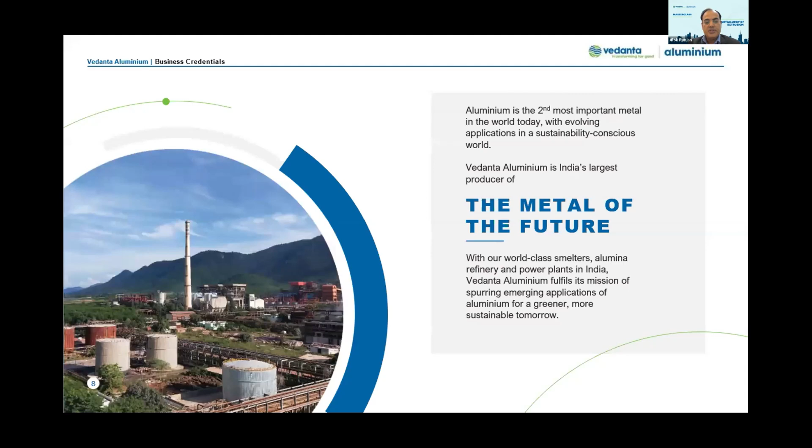Very quickly, I'll talk about the aluminium assets. Aluminium is the metal of the future because it's highly sustainable, infinitely recyclable, and highly versatile and dynamic. Aluminium today can be used to replace any other metal like steel, copper, wood, glass, or plastic. That's the diversity and versatility of aluminium, since it can be used in multiple applications.

In the aluminium business, we have an alumina refinery in Odisha, and we operate 3 smelters - 2 in Jharsuguda, also in Odisha, and 1 in Korba. Total installed capacity is around 2.3 million tons, but we are on our way to expand that capacity to close to 3 million tons. This expansion will come in Korba, Chhattisgarh.

One of the key differentiators today for any resources company is how sustainable it is. The biggest challenge any natural resources company faces is intergenerational equity - we operate with non-renewable resources, which means they will deplete and not last forever. So how do we develop resources in a way that future generations are not adversely impacted? There's a huge focus on that, and we take pride in it - we are one of the largest renewable energy buyers.

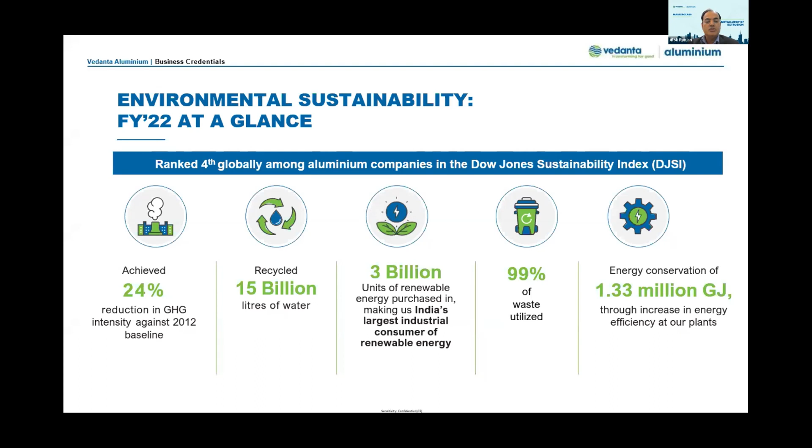For instance, we bought close to 3 billion units of renewable energy last financial year. We recycled 15 billion liters of water. Almost everything we produce is recycled and reused, so there's nothing called waste. We have a program called Wealth from Waste, ensuring nothing goes to waste, and we extract every value out of whatever we operate upon. Similarly, we were able to conserve close to 1.33 million gigajoules of energy last year - that speaks to our focus on sustainability.

I already spoke about the social impact. Another marquee feature is that when we talk about inclusion and diversity, it's not just about taking steps for gender diversity - we have gone ahead to include all genders. Some transgenders are also very comfortably assimilated into our family, working in various roles. This shows that sustainability or ESG is not just a buzzword for us, but is at the core, at the heart of our entire strategy, and we take pride in whatever we do.

So with this, I'd like to hand over the session to Ramya, who can then take this session forward.

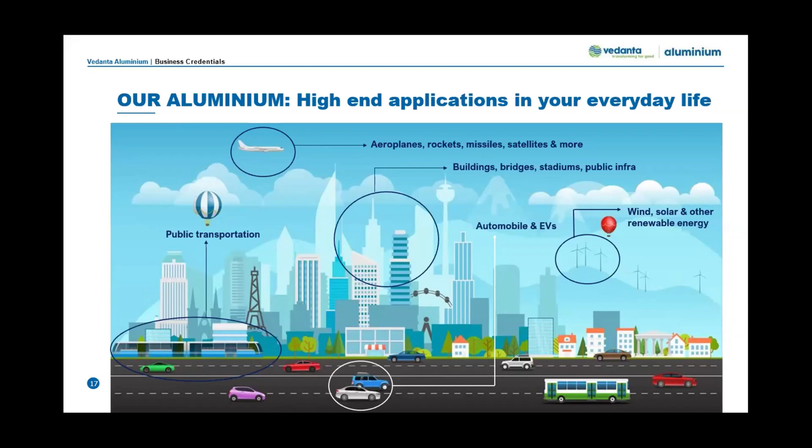Taking it forward, we are selling this product to 50 plus countries, which encompasses all the American continents, Europe, Oceania, and Middle East and Africa.

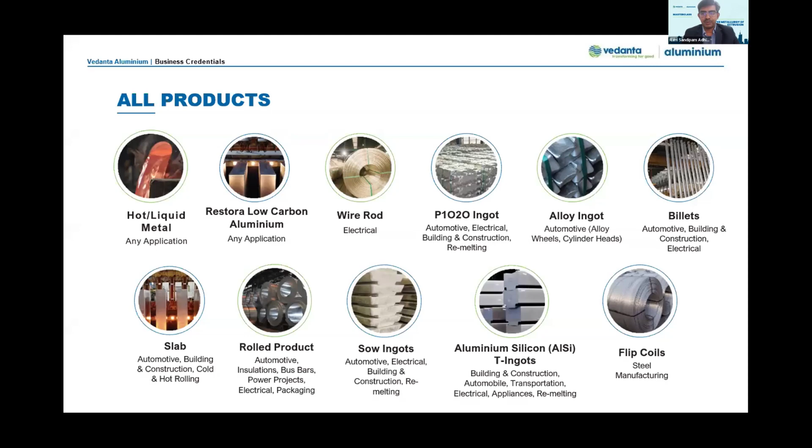Our products are typically supplied in various forms and factors, starting with wire rod, billet, foundry alloys, and remelt products. These products go into different applications, and the form factors and process depend on the end product, ranging from aerospace to automobile to electrical segments.

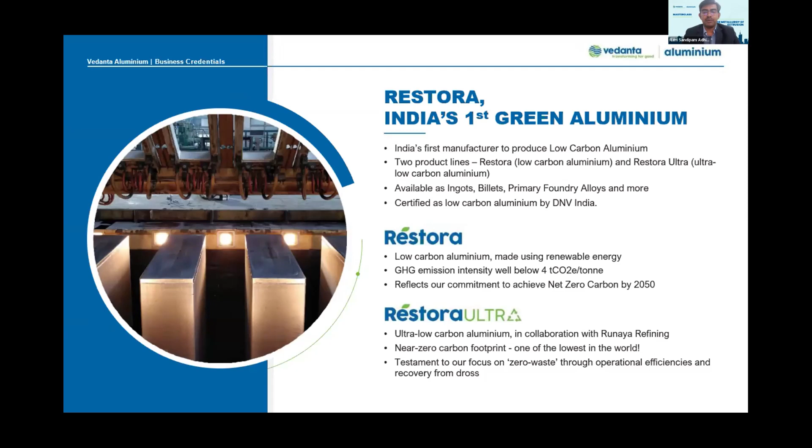Talking more about the sustainable footprint of Vedanta, we have launched two products: Restora and Restora Ultra. Restora is an aluminum product produced using renewable energy, with a GHG emission of 4 tons CO2. Restora Ultra is the ultra-low variety with near-zero carbon footprint, produced in collaboration with Runaya. This is a testimony of the zero-waste culture we are driving.

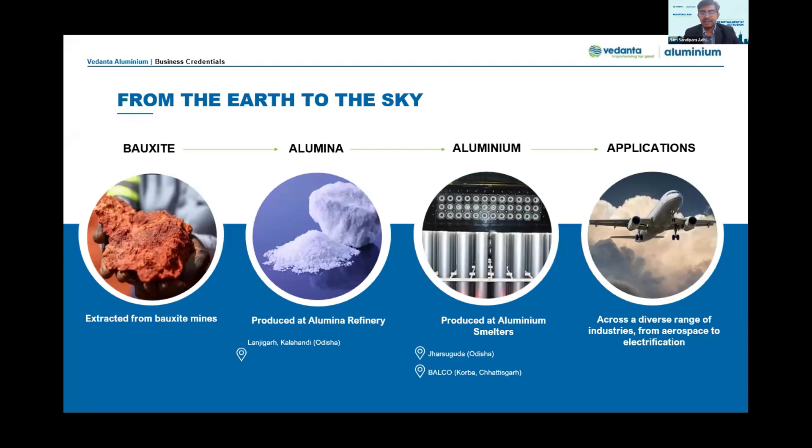Talking about our value chain, it begins with bauxite mining, then goes to the alumina refinery where bauxite to alumina transformation takes place. Then it comes to our smelters at Jharsuguda and Korba, Chhattisgarh, where we electro-refine alumina to aluminium. This aluminium is then transferred to our cast houses, where it takes various form factors before finding application in almost every aspect of our life.

Talking more about the technologies we deploy, it starts with state-of-the-art technology, and these technologies majorly come from USA, Austria, China, and Italy.

These are the typical production systems that we deploy, and we have our laboratory accredited with NABL accreditation, with all the state-of-the-art facilities to ensure our product stands out with respect to quality performance.

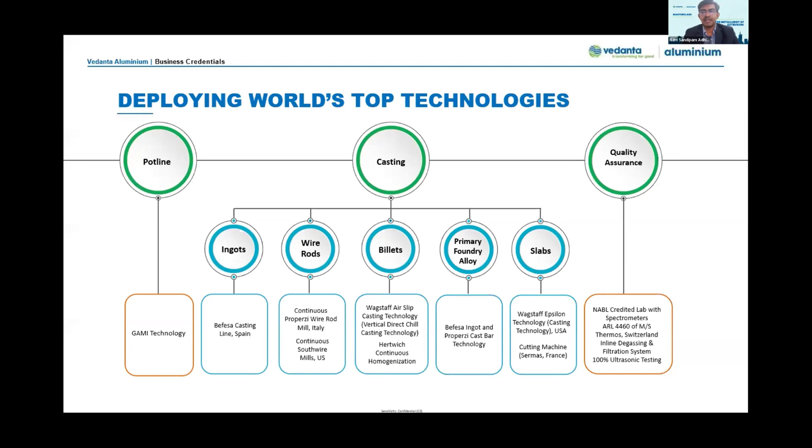Talking about quality, we are certified with an integrated management system encompassing ISO 9001 for quality, 14001 for sustainability, as well as 45001 for safety.

We are also certified with International Automotive Task Force, IATF 16949, which majorly talks about automobile requirements and how we comply with those.

Recently, we got 15 of our products certified with BIS certification as well. So on the quality and sustainability standpoint, these are the few certificates that we have.

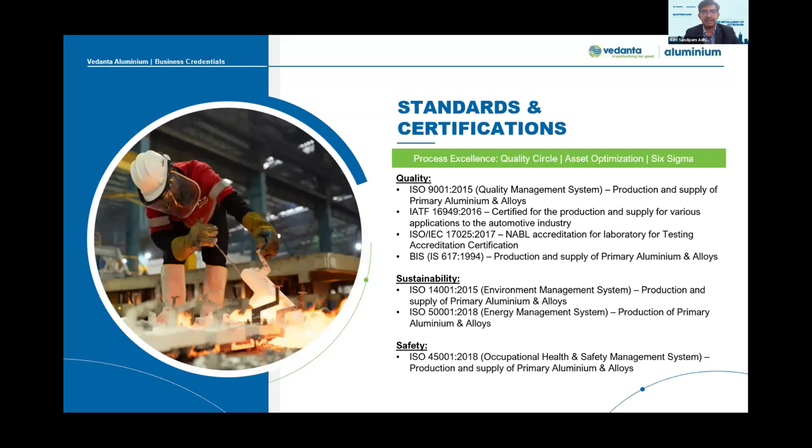Talking about customer service, we collaborate with customers to develop new products and support them in improving their production process and efficiency. We have our global expertise technical service panel who engage with customers to ensure they get the right input for product quality and to improve the overall journey. We also work on market development and customer devices if there are any.

Currently, we are at 460 KT operating capacity, which we are ramping up to 1.2 million. We currently offer diameters ranging from 6 inch to 10 inch. I am pleased to inform you that we have commissioned another 120 KT billet feed, which will offer 12-inch press size and diameter as well. We are also in the process of getting another set of tables for 5-inch, which will be commissioned by FY24.

Now, I would like to present to you a short film about our offering to the extrusion market.

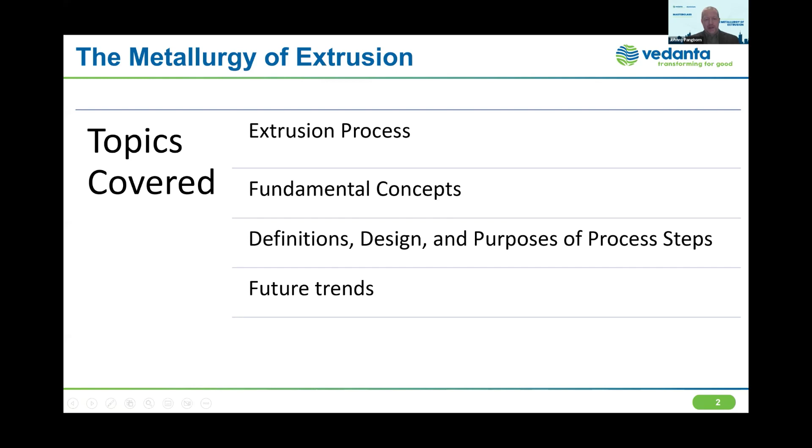General overview of the extrusion process. We won't get in too much detail, but talk about it with regards to the context of the metallurgy, building up to the importance of that and how we need to control that in our facilities - some fundamental concepts, some definitions, and looking into more detail into the design and purposes and the definitions of these process steps. And really that's where we'll get into the meat of the metallurgy. Then we'll close with some future trends, what's coming later.

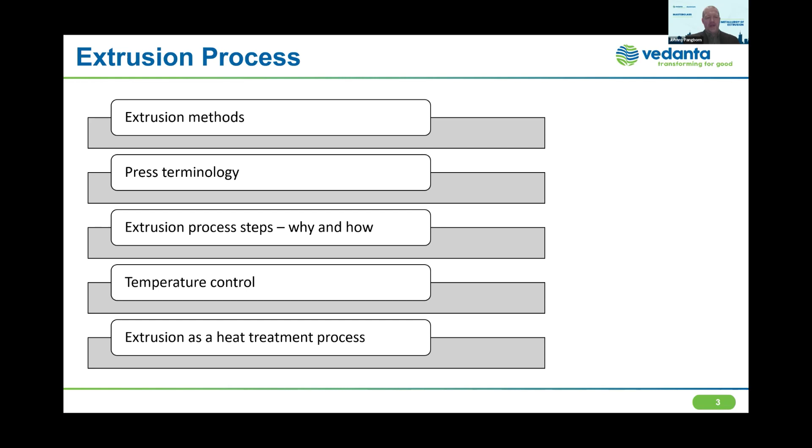Extrusion process - first there are several extrusion methods that we'll briefly outline, talk about some basic terminology so we all have the same understanding. Then dive into the process steps, the why and how of what we do, specifically addressing the need for good temperature control and presenting extrusion as a heat treatment process. In light of that, we're primarily talking about 6xxx alloys, although many of the topics would apply to all different types of products.

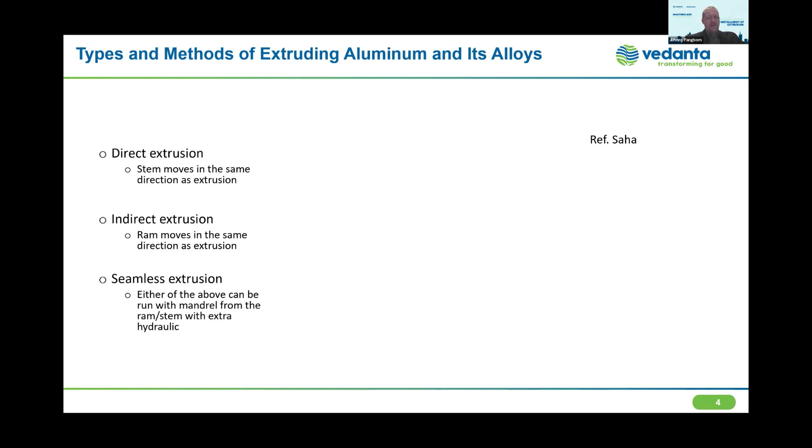Here are the three different methods of extrusion we're going to cover. First is direct extrusion, which is by far the most common, where the stem or ram moves and pushes the billet through the container and out through a die in the same direction. Indirect extrusion has a sealing element, a container that move together over the die - the die is moving in the opposite direction of the extrusion, and the die is on the end of a hollow stem or ram.

And then seamless extrusion, which can be applied to either of these, and the direction's a little different for this particular diagram, but the stem is moving from right to left, and there's a mandrel extending off the stem causing the hollow element within the die. In this process there is no seam, no weld, as we would see in a porthole die.

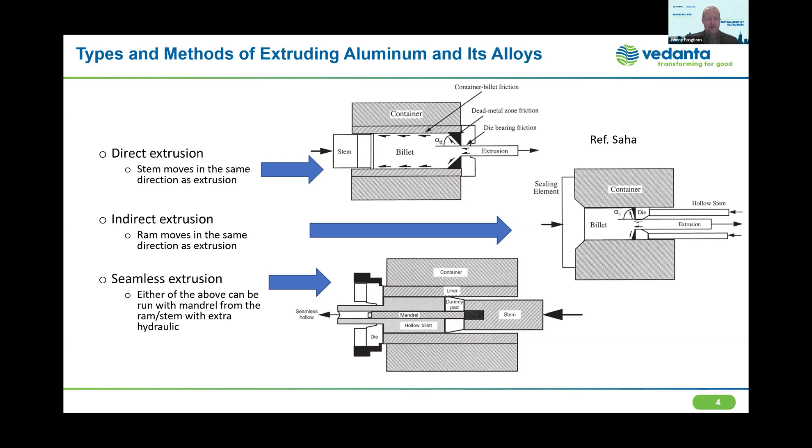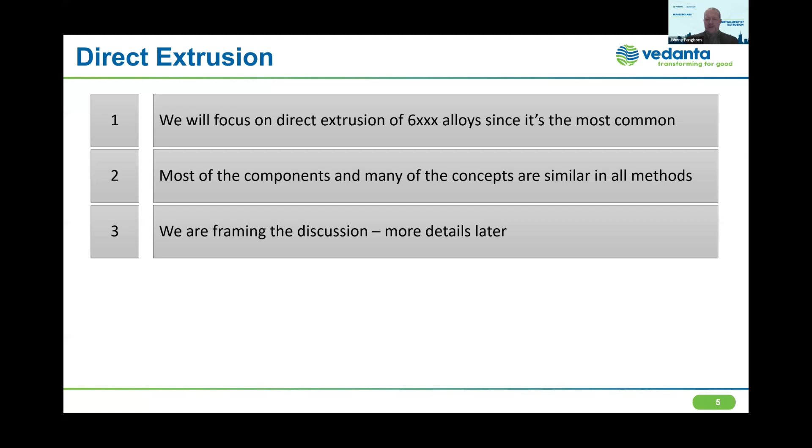For the purposes of this discussion, we'll be focusing on direct extrusion of 6xxx alloys, because that is the most common and most relevant to us. But most of the different components of the discussion will be similar to other alloys for direct extrusion and also to indirect extrusion and even other materials. As we go through this, we're framing the discussion for more details later when we talk specifically about the metallurgical aspects.

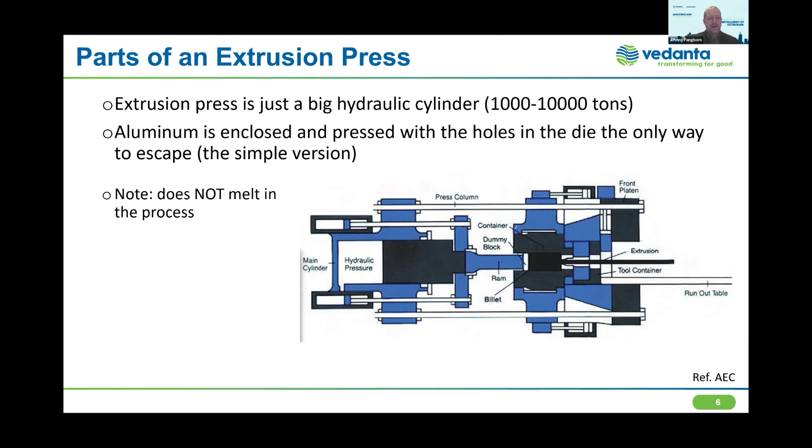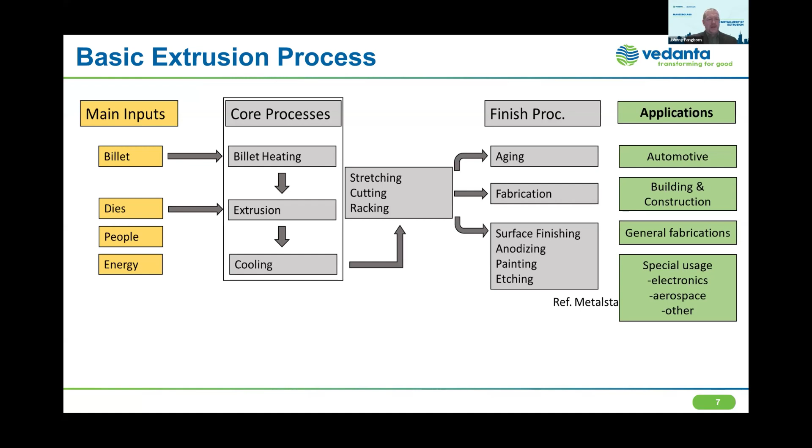So we're going to show a quick video, and some of this may be familiar for those of you in extrusion plants, but this is a very good video that outlines what we're talking about before we continue deeper into the metallurgy.

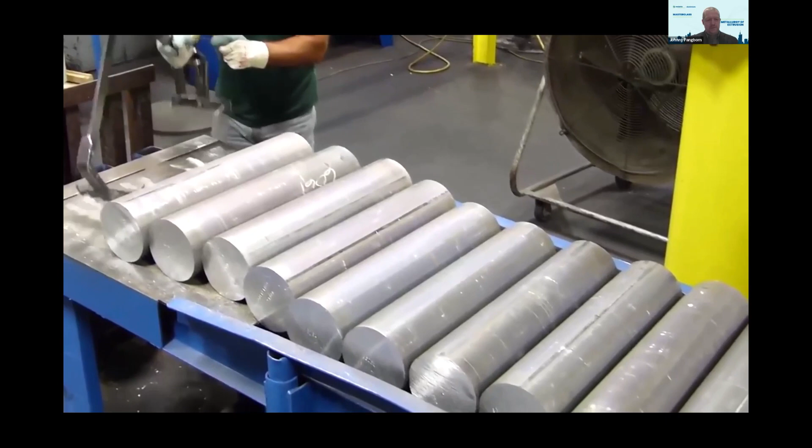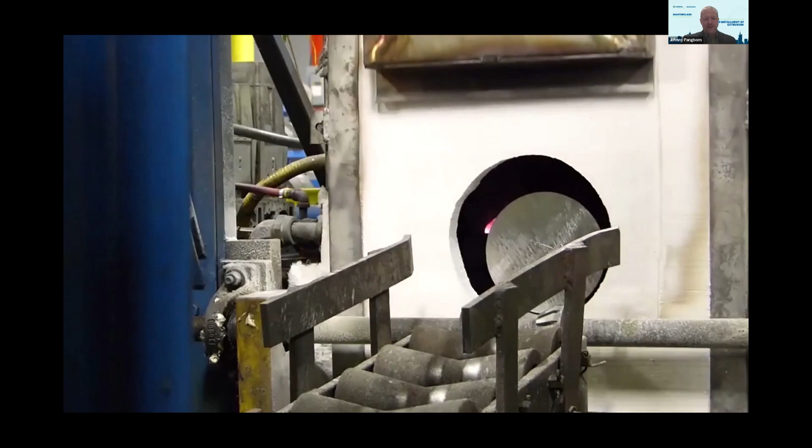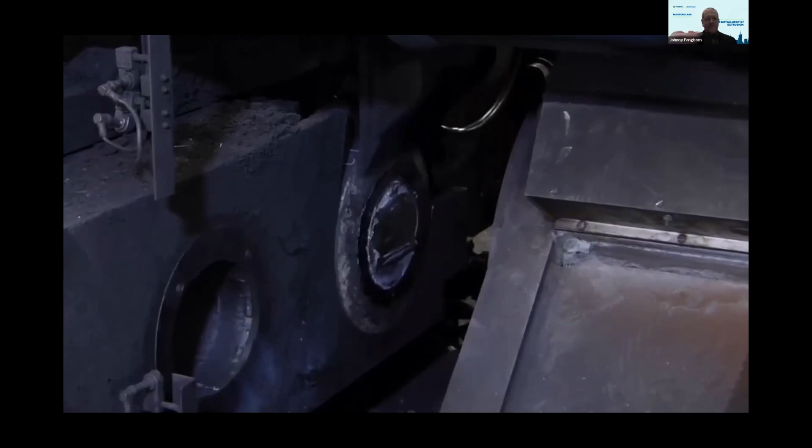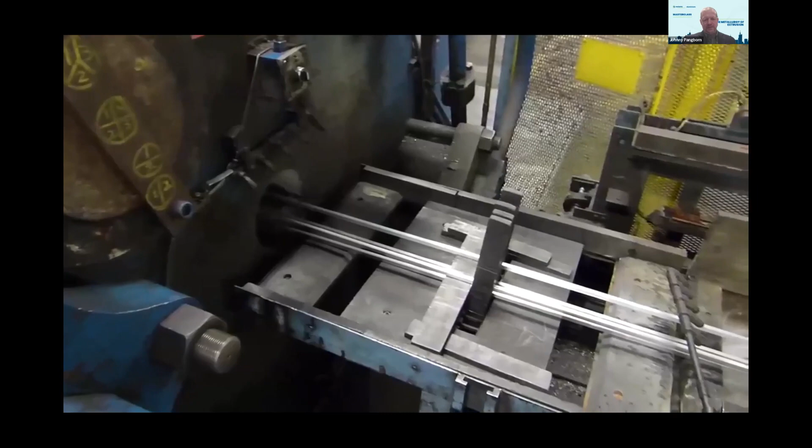Specified aluminum alloy cast in log form and pre-cut to uniform length is known as a billet and is first placed into the billet furnace, where it's heated to almost 900 degrees Fahrenheit. The billet then exits the furnace and is transferred to the extrusion press. The excess material from the previously loaded billet is sheared, and a ram pushes the new billet through the container and extrusion press using thousands of tons of hydraulic force. The soft aluminum is pushed through the steel die opening to create a fully formed profile.

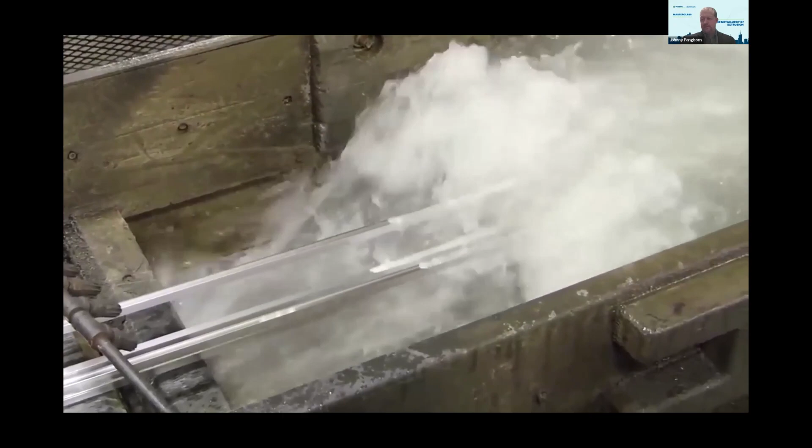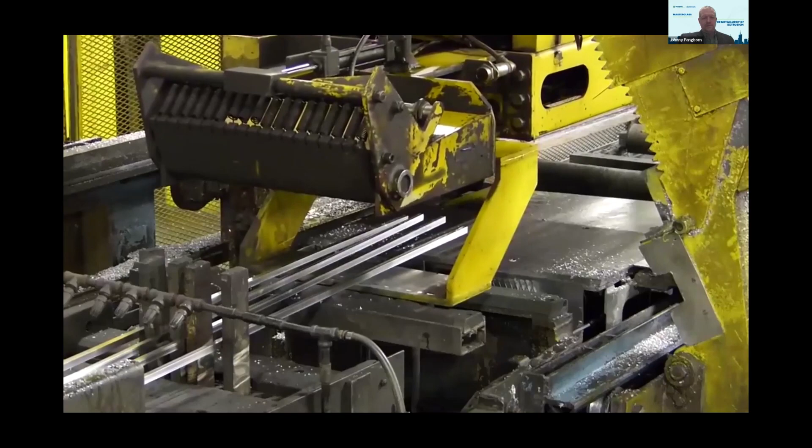As the formed profile exits the extrusion press, it is cooled in a water bath. This is called quenching and is done to uniformly cool the extrusion at a controlled rate to establish intended mechanical properties. A device called a puller grabs and secures the hot extruded length and guides the profiles down the runout table. The puller and runout table, a sophisticated mechanical process that uses conveyors and belt systems, is synchronized to the speed of the extrusion press.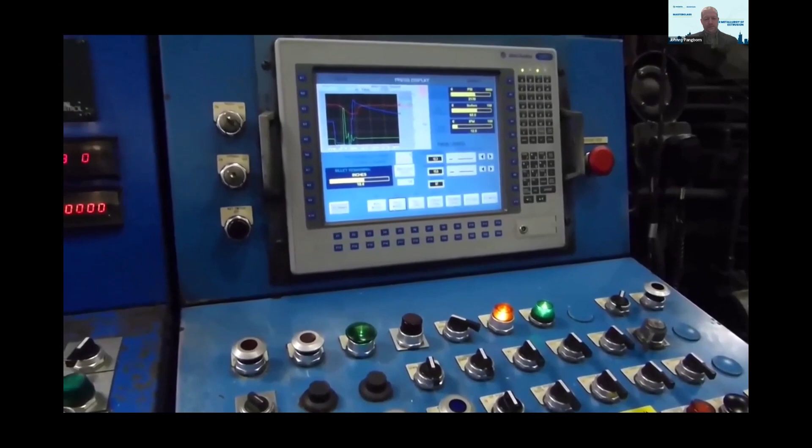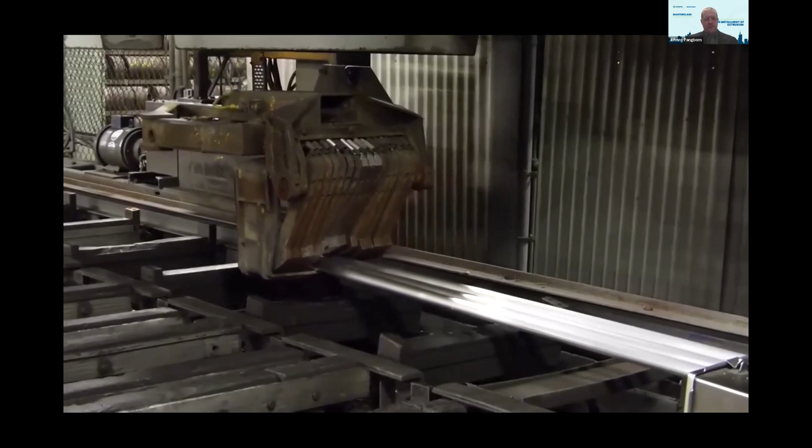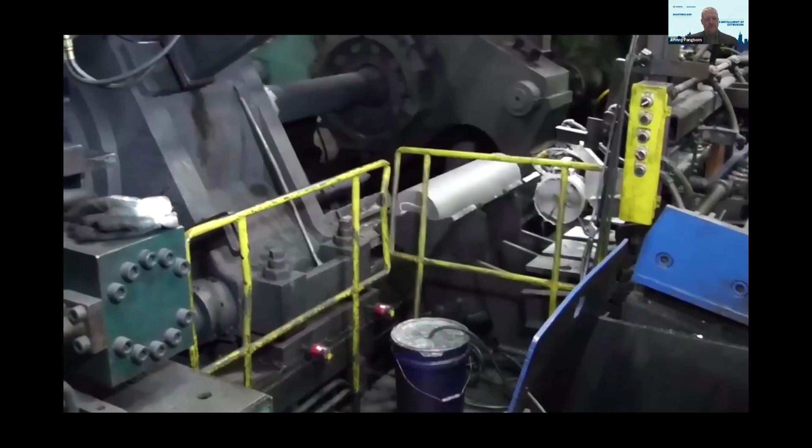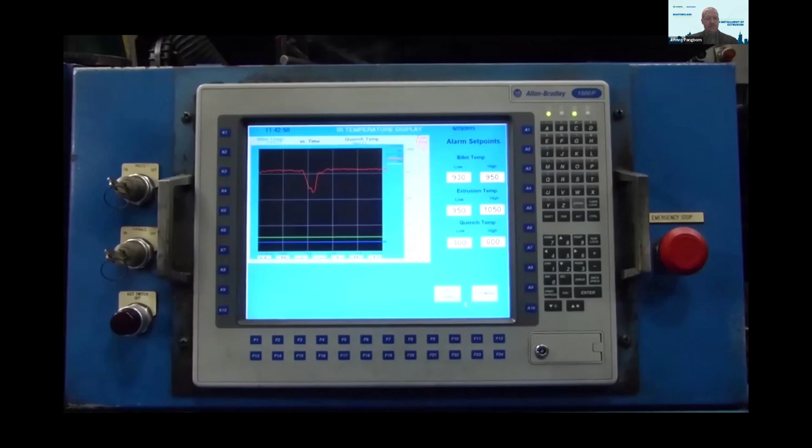Let's take a closer look at the importance of temperature and process controls throughout the extrusion run. Controlling the heat of the alloyed aluminum as it moves through production is a critical success factor that requires a number of variables to continuously align with one another. We've already discussed the heating of the billet to a malleable temperature, but you should also know that the container, extrusion die, and other support tooling are also preheated to temperatures that allow the aluminum operating temperature to be maintained at desired levels throughout each push. If these process components aren't precisely controlled within their specified temperature ranges, the operating temperature of the aluminum will be impacted by those components, either by adding to or absorbing from heat required for solution heat treatment.

There we go - excellent video there, and it shows the process, and it also leads into where we're going next, which is really going to be pretty deep into the temperature control and how important that is in the process. Next slide. Here we go. First of all, some definitions or fundamental concepts I wanted to outline.

First, strength. That's a very simple concept, but really what we're talking about is resistance to deformation. So in the aluminum, we're applying a force - how much force does it take to deform that?

Temperature, of course, is a very basic concept, but really what defines temperature is the movement of atoms - how rapidly and to what degree they're vibrating within the table in front of us, within the aluminum that we're processing. And that has a big effect for us as we talk about time and temperature, because the temperature changing allows things to happen more quickly or more slowly, and we'll talk about that.

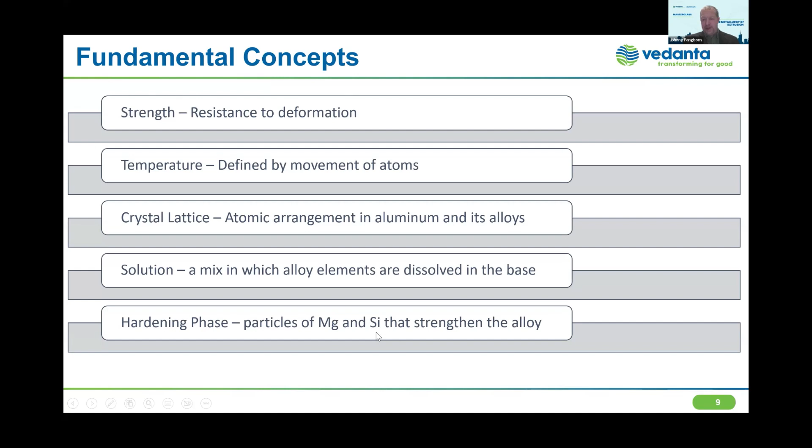Solution - this is an important concept. Basically, like you have hot tea and you put sugar in it, you are dissolving the sugar. In a similar manner, when we change the times and temperatures, we are solutionizing our metal, so that for 6000 alloys, magnesium and silicon, the primary alloying elements, we're dissolving those in the base aluminum, and we have a solution that, at least from a high level, is indistinguishable from the base. We'll contrast that a little bit with hardening phases, which are actually distinct particles that come out of solution. In our case, again, magnesium and silicon particles, and we control those in a way that strengthens the alloy.

So hardening particles - these are magnesium and silicon particles at longer times and temperatures. As the particles grow, they will become Mg2Si, but there are many other phases in the spectrum. This is, again, highly sensitive to temperature and time control. Again, remember, the definition of temperature is how active any molecules or how the atoms are moving.

So I'll show a little graphic here. On the left-hand side, let's imagine we're looking through a microscope at the microstructure of the aluminum, and we see little or no magnesium and silicon particles.

If we are out of control, what very often happens is we get equilibrium Mg2Si phases, and we'll get few of them, and there will not be very many. These have very little positive effect on strength.

Contrasted with, on the right here, if we were to take the same amount of magnesium and silicon and control how that comes out in the matrix of the aluminum, we would have many fine particles. And this is much more effective for strengthening.

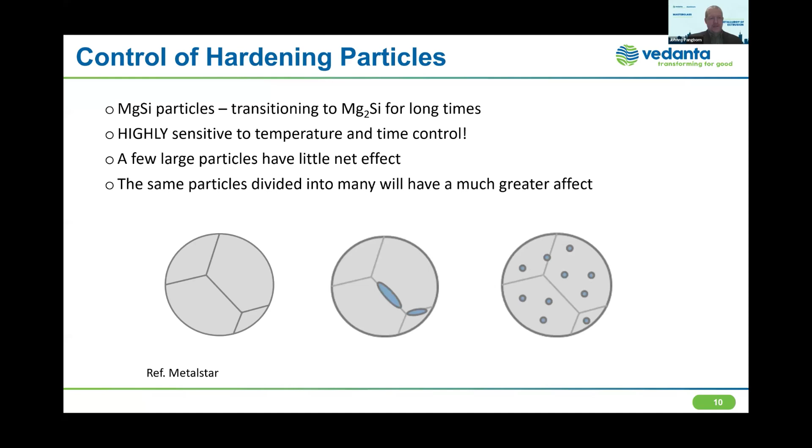So looking at this crystal lattice we spoke of here. This particular example is calling out copper atoms, so it's for a 2000 alloy, but it's exactly analogous to what we're talking about, where we have the solvent, primarily aluminum atoms in this lattice, and our alloying elements are mixed within, and from a distance, they're indistinguishable, and everything fits.

A particle, on the other hand, is something that is distinct and different. It is not in solution, but it is a distinct component. So in this example, these copper atoms, for us, it would be magnesium and silicon for 6000. They begin to come closer together, which is much easier at higher temperatures. Things can happen more quickly and form a distinct particle that no longer fits in this crystal lattice.

So you can see in this schematic, these lines are no longer straight, and that is going to increase the strength, as it will be harder to deform the structure. So when a force is applied, the material will not move the same way it did before, and this particle is providing strength. And then ultimately, you have more distinct particles as they grow larger. Eventually, if they grow large enough, you really don't have that many relative to the small ones, so you're not adding that much strength.

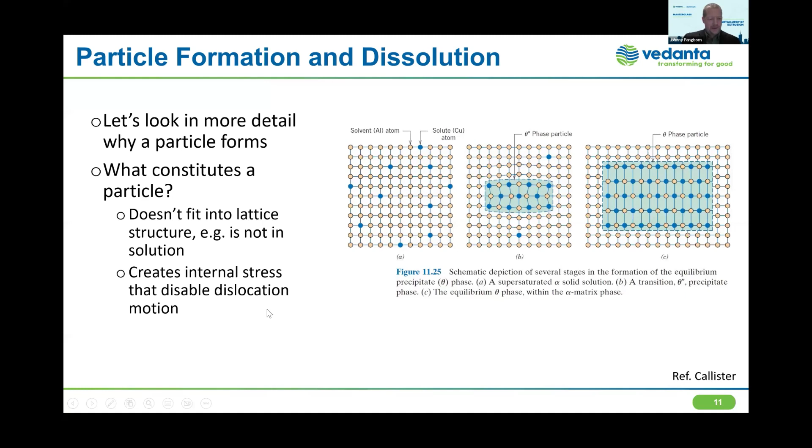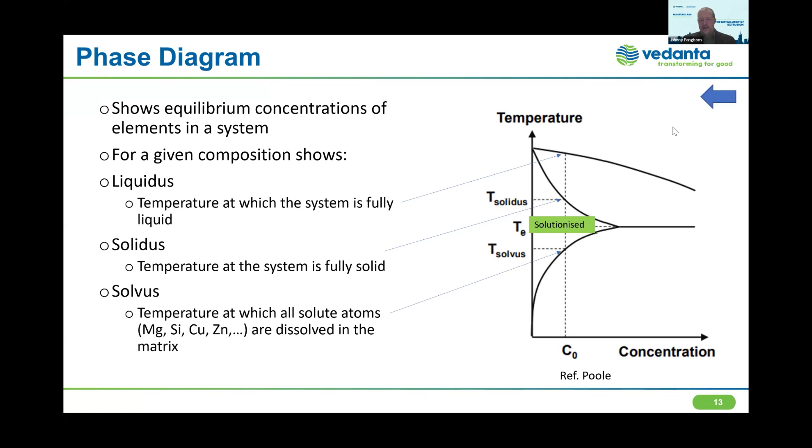Going back to this other slide here - this is defining the top of this critical range. And the lower is really defined by the time it takes. It's not that at the lower temperatures, the precipitation of these hardening phases doesn't want to happen, it just happens more slowly. So this has been chosen to be defined as kind of a critical range.

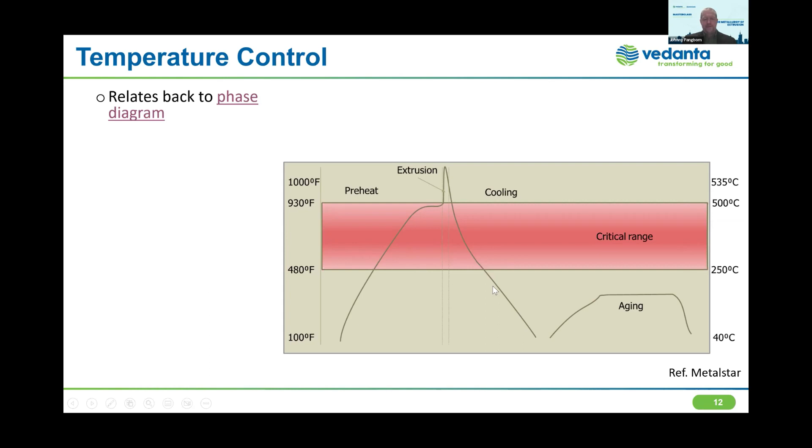In aging, we use much, much longer times, hours, to get the particles, and we're outside this critical range. And that's what we ultimately want to achieve at the end.

So we have some strengthening from the magnesium and silicon in solid solution, but in aging, we're increasing that by controlling and having these really fine particles that we want. So in extrusion, specifically the goal is to keep those hardening elements, magnesium and silicon, in solution so that we can age later.

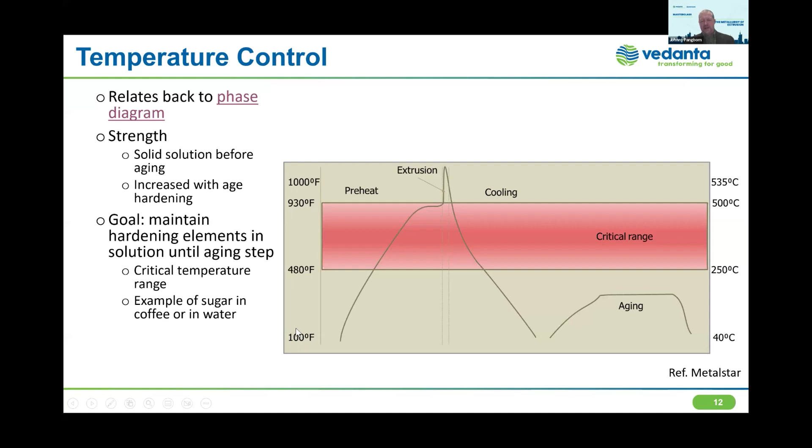So going through these temperature ranges, again with the example of sugar in coffee or tea or hot water being dissolved, and then at a lower temperature, you're not able to dissolve as much.

Looking more specifically at the extrusion process itself, we have our preheating step where we're going up to that critical temperature range. We need to have a softer alloy that we can push through the die reliably, but we also need to control it to get the final product we want, particularly in terms of property control or mechanical properties, by controlling how we go through that critical temperature range.

Extrusion, of course, is our main forming process. We have the heated billet, and we're pushing it through the die that we chose to produce something for our customer. But it's really important to control this and make sure we're well above the critical temperatures.

So the 500 C range we threw out there is the high end of the critical temperature range, because actually some particles will begin to form in preheating that we do not want, some large Mg2Si particles, but in extrusion we have the opportunity to absorb that.

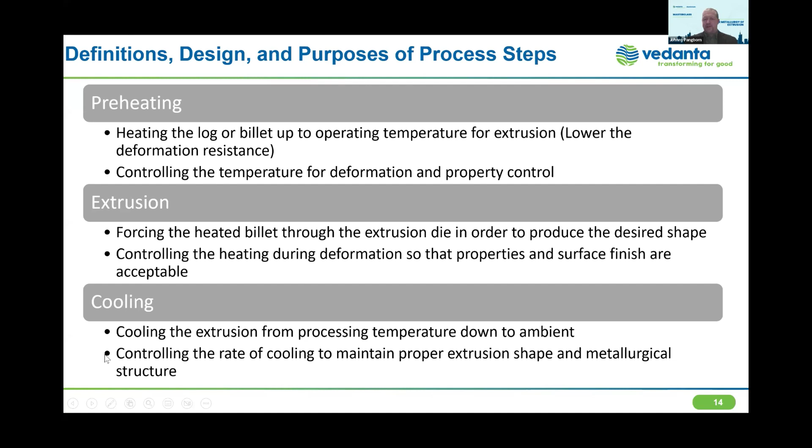And then finally, cooling. We need to cool our material, and again we choose how we do that. We're coming down through that critical temperature range, so we want to get through it fairly quickly.

Billet preheating temperature is going to vary depending on the product and what we're trying to accomplish. Many factors here that I won't read, but generally speaking, quite broadly, here is a temperature range that we would normally be extruding at for 6,000 series alloys. There will be exceptions, but that's a good ballpark.

One of the more important points is that we don't want to hang out at the lower end of these temperatures, because we're within, or at least very close to, that critical temperature range. So we want to have a stable operation where we're not just having metal stay at temperature, and we certainly don't want to just leave a preheater on for extended periods if we're not producing.

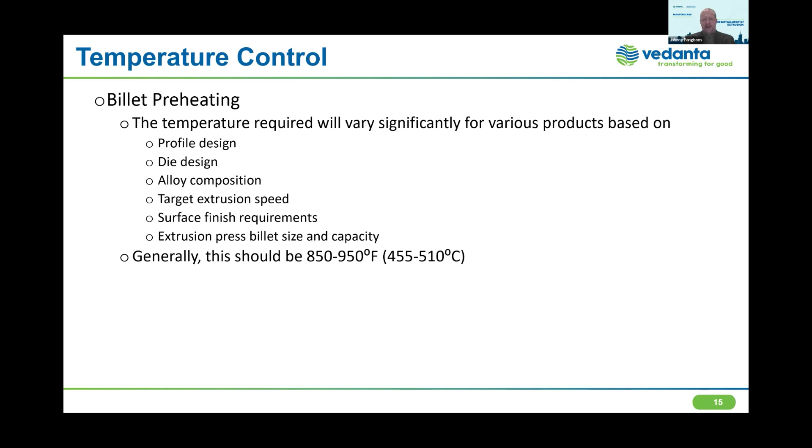Extrusion is our main forming process, but it is actually a heat treatment process as well, and the feedback we get for that is the exit temperature. So in this schematic, we have metal coming through a die through the press platen, and at some distance we're able to affix an infrared camera and get a reading on the exit temperature.

There are other methods we can directly measure with a thermocouple wand or something like that. But this is a critical control parameter for everyone in the extrusion business, because we are intending to solutionize the magnesium and silicon in extrusion. So we're actually doing a solutionizing heat treatment in this process. And of course, we can use this as feedback for maximizing our extrusion speed while maintaining, or very often improving, our quality as we increase speed.

Exit temperature is not set directly—it's a resultant of other parameters. There are some software packages that will provide feedback from the exit temperature, and you can set the range you want and it will adjust your parameters to achieve that. But really, it's your extrusion speed and billet temperature that are the main variables at the press controlling that, combined with the other aspects that are more fixed.

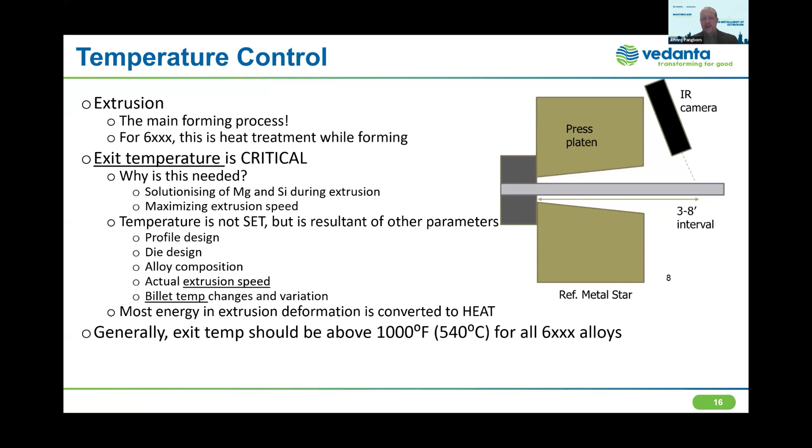I will say that generally the exit temperature should be well above the critical range. I would aim for at least 540 for 6,000 alloys, with the reason being that we're improving our heat treatment process.

We're well above the critical range, and we're more easily able to absorb particles that are coming out in that preheating. Cooling, it's necessary, of course, to control. We're coming back through that critical temperature range. Cooling rate that's required is going to be highly dependent on what alloy we're extruding, and there may be some variations depending on the mechanical property requirements.

Most of what we extrude, if we're a facility that extrudes, for example, out of 6063, we may primarily just have one mechanical property requirement and not have a lot of variability there.

Cooling method, there are different ways to apply the cooling. We saw water quench in the video that we showed. There's different types of water bath or water spray or air, but I do want to emphasize that the rate is ultimately what needs to be controlled, not the method. The method is the means to an end.

So for example, a 6061 may often require water quenching, but if we're able to achieve the rate with a good air cooling, then that would be perfectly acceptable.

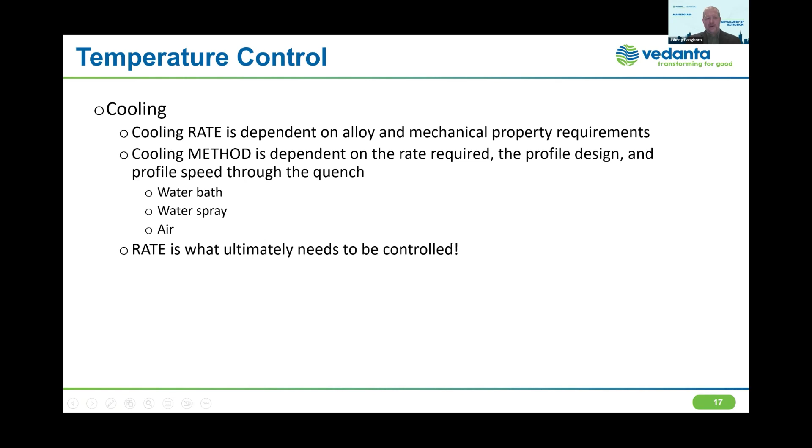So again, temperature control is really critical, and so is the time. Those are our main control parameters.

As you heat, you really won't have any significant growth. You're not having any major delays where you're staying at an elevated temperature for a long time, getting it through the preheating process. You're extruding at a sufficiently high temperature to solutionize everything.

You're cooling at a rate that maintains all the mag and silicon in solution. And then when you age, we get these finely distributed particles that are optimum for strength.

Conversely, if we're out of control in any one of these steps, we have problems. If we don't heat properly, or we allow the billet to sit for a long time at the preheating temperature, that is really the main culprit that we have problems. We can get very large particles if we don't extrude at high enough temperature. We're not dissolving. If we're cooling too slowly, we get particles.

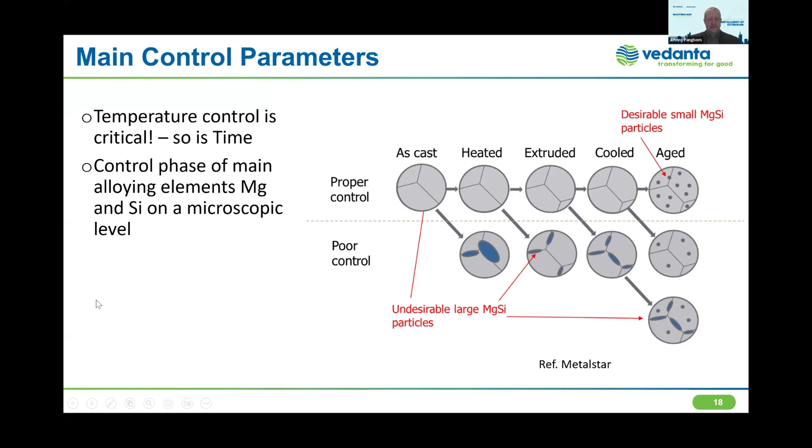I won't read all this, but again, there's this critical temperature range, 250 to 500 C. Preheating typical temperatures here, we'll just want to highlight 455 to 510 C is pretty typical for 6000 alloys at least. We will start to grow some large particles, but in the extrusion process, if we're keeping our extrusion exit temperature high, we'll be able to absorb those particles.

Cooling needs to be quick enough to absorb. I don't have it on here, but for 6063, if we come through that range in 4 to 5 minutes, that would generally be perfectly acceptable. For a 6061, for example, probably at most 2 minutes, depending on the wall thicknesses and so forth.

And then aging, typical aging temperatures, there can be exceptions to this as well, but 160 to 185 C.

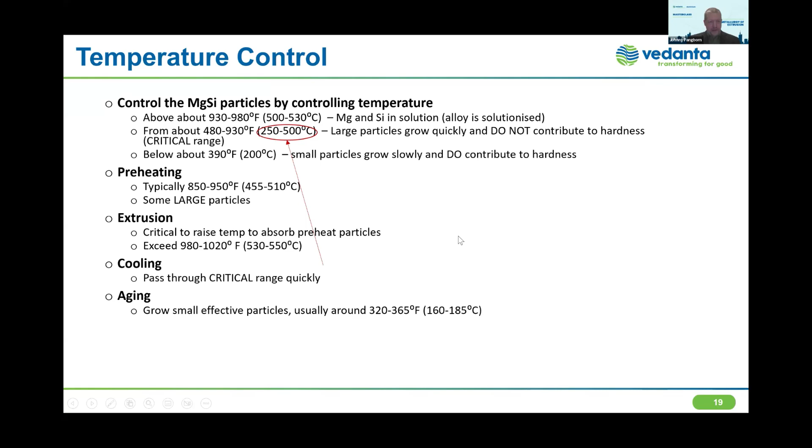So there's a lot in there quickly, but what I really want to emphasize at the end of this is we need to focus on the basics. Again, temperature and time, have a repeatable process. I will also say the equipment should be reliable, and we should treat the equipment with the same level of control that we treat the process.

So if we need to be changing dummy blocks and aligning equipment, then that is done in a controlled way as well. Typically, the real meat of it here for those of us in production environments is we could fairly effectively drive towards better quality and having a much higher degree of throughput by just doing these very fundamental basic process improvements.

And making sure that our people on the floor are sticking with the plan. We have an SOP, a process for them. We're following that, and we're getting good results. I've been to many extruders over the years, and the best extruders typically - probably isn't strongly enough - they always have good housekeeping.

They have good discipline on their recipes and run the product the same way every time. They have engaged their workforce, trained them to understand the process and know how to react when there are exceptions, and have good internal communication so people know how they're performing.

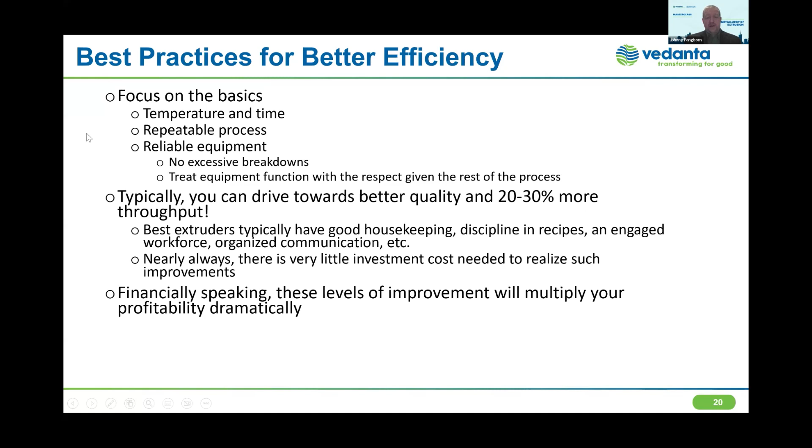Of course, financially speaking, that's what matters at the end of the day. If we have this type of throughput improvement - 20 or 30, or even I've seen 50% improvement - that has a huge impact on the profitability of the company, as well as the future of the company and everyone employed there.

Some future trends I wanted to point out: there are really getting to be some good numerical simulation tools, something perhaps some of you use in your facilities. For example, flow software such as Qform, where you put in the parameters and it calculates how the shape is going to come out of the press, and how, given a set of cooling standards, you'd expect it to deform. You can use that in die design as well as process setup. Those simulation tools are becoming much faster, less expensive, and more accurate than ever before.

Automation is a big topic now and will be in the future. To me, automation is more about consistency than cost, although if you have a material handler or stacker, you could potentially have fewer employees to pay. To me, the real benefit is in how consistent you are.

So I would encourage each one of you to design your process to meet your needs, whether or not you have such equipment. Automotive is growing, but I will caution that there's a whole other level and a higher commitment of control needed to get into automotive. But that's definitely a growing sector, and it's very exciting.